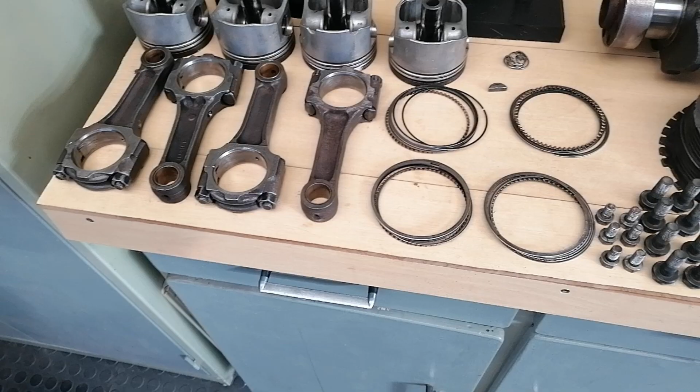In this video we're dynamically balancing the rotating assembly of a 1600, I think it's a VVL Toyota 20 valve engine. Let me just show you the engine quickly. So these are the components laid out here: the 4 conrods, pistons, gudgeon pins, piston rings, flywheel bolts, pressure plate bolts, pulleys, crank, and this is the flywheel and pressure plate.

So I got to make these harmonic, and let's just first see how much they are out. First I'm going to start on the crankshaft.

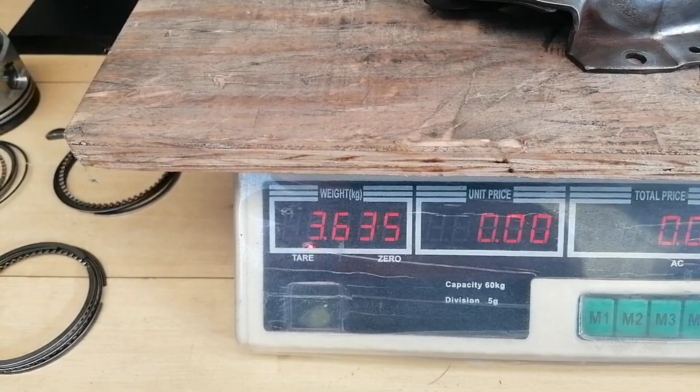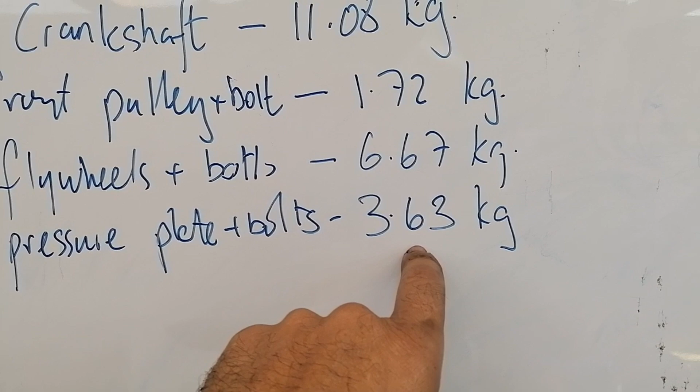Okay, so I took the weights individually of the components, as you can see here, and that is all the weights that I'll be needing to put in the computer so the algorithms can work out what the weights are, where, and where the unbalance is once I calibrate it and all that kinds of stuff.

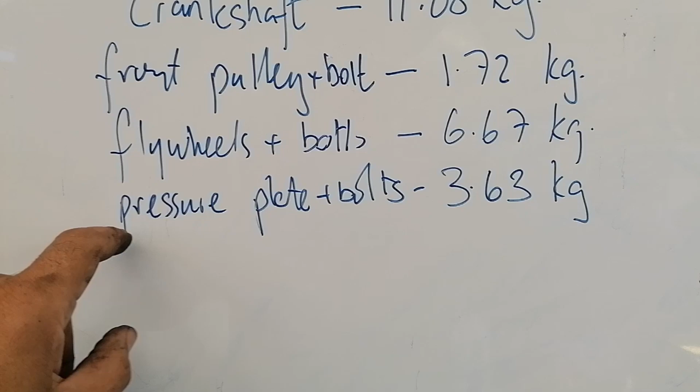But these will all be used individually. First I'll be using the crankshaft as an individual item. Then I'll be putting the front pulley and the flywheel on as two items, and then I'll put the pressure plate on with its bolts and stuff. So first let's set the crankshaft up in the machine and see how out of balance that is, and get that right.

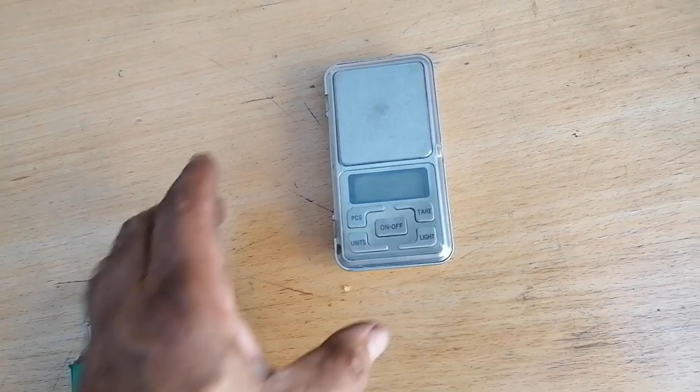Alright, so she's on the machine, she's almost ready to go. Got oil on the journals, belts on, blacks there, my reflector tapes there. Machine is on. Right, so it's time for me to do some measurements on here now.

Stick it in there and balance this boy. Okay, so also just on a side note...

I'm going to put this thing's operational speed at 5,500 revs, but I'm only going to balance at 700. So in other words, although I'm balancing at 700, the algorithms will work all this weights out at 5,500 revs, like when the engine is actually working at that rev range, 5.5. I'm not going to go to 6,000, 7,000. I mean, that was, you're just going to kill things.

That's temporary. Revs 5.5 is basically where the rev will stay most of the time, at speeds and stuff like that. So I'm going to work at that operational speed, 5,500 revs, but my balancing speed is going to be 700. I don't know if I said 700 early on, but anyway, let's put this stuff in the machine now.

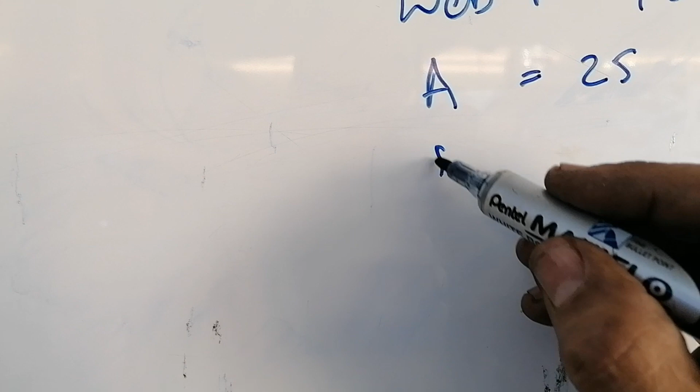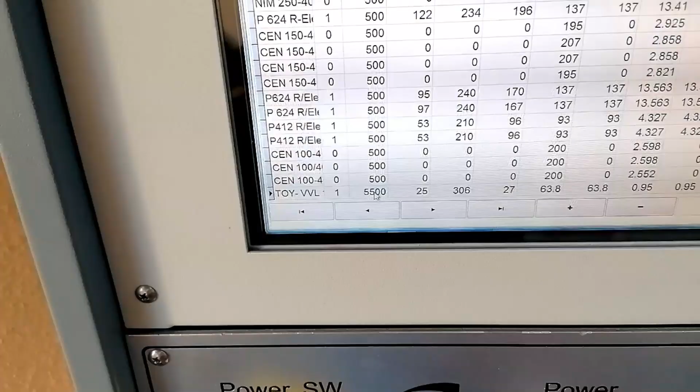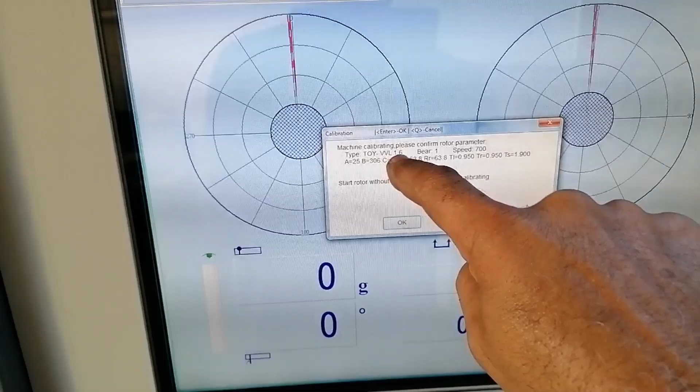Okay, so let's just put this data into the machine. Okay, so I got all the information in. Here's my screen that's up. I'm going to start calibrating now. You can see here I got Toyota VVL 1.6 and I'll start calibrating now.

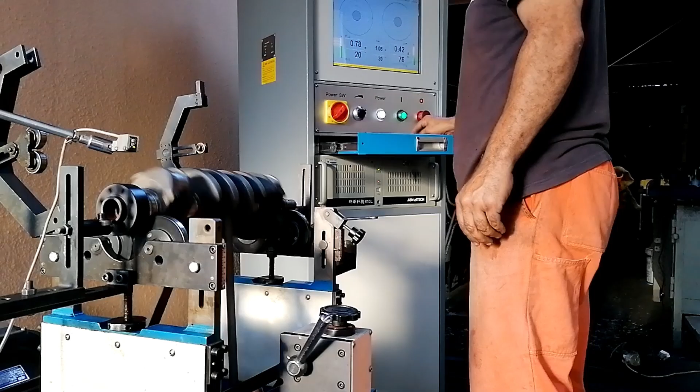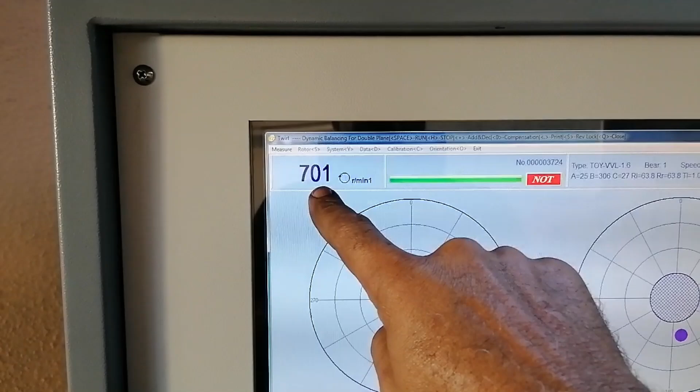Alright guys, so that's running. She's at 700. Like I said, I'm going to do this at operating speed. She's 15 grams at 118 degrees, 7 grams at 167. So let's print this quickly.

Okay, so there we have it. 15 grams, 7 grams. Alright, let's zero this out.

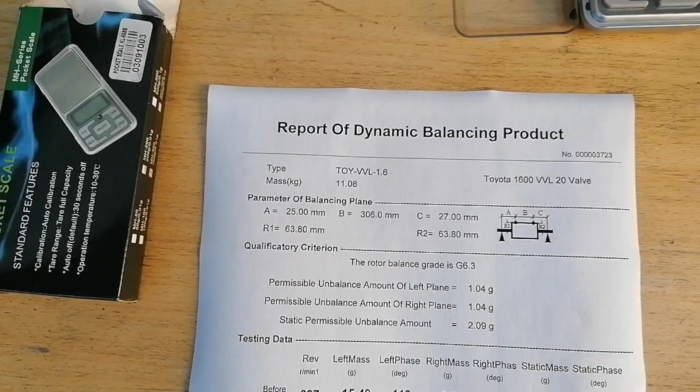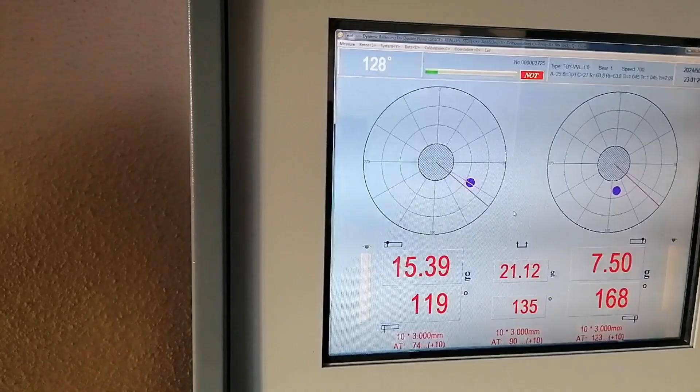Alright, so I'm going to turn it now to 169 at 168 on that one there. Let's just turn, and then that will determine where I must take off weight. Okay, so there, that's 168. Okay, so that's now 168 there. So I must grind somewhere here, and then the next one is 119, so I'll turn it back. There you can see that's 119 there, that's on that mark there, and that is on this one over here.

Okay, let's play around with this crank and see how far I get. Right, so I've been working the crankshaft a little bit, and you can see I'm down to 10 and 2 now, so we are getting closer. I'll keep on going at it.

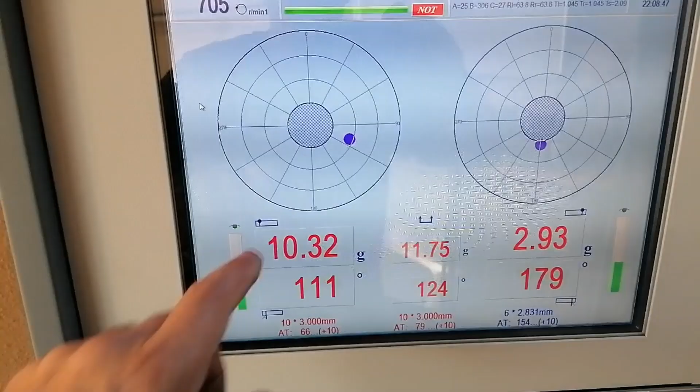Okay, we're running again after grinding. Let's see, going up to 700. And we're down to 3 and 1.3, so we're creeping in slowly but surely.

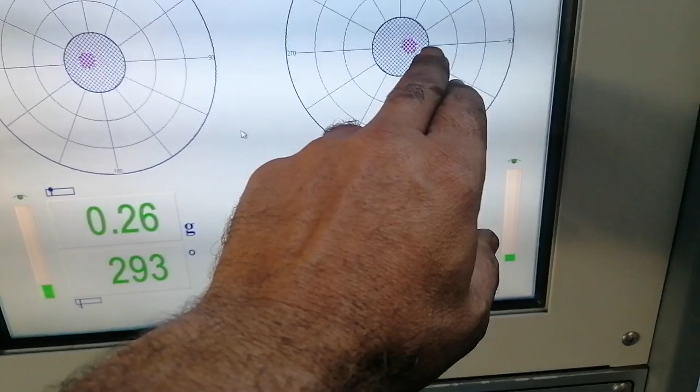Okay guys, so this is the crankshaft done. As you can see, we are 0.26 and 0.32, slightly off the center, but I mean that's neither here nor there. The main fact is that we're under half a gram out, so the crankshaft is perfect. So let's just print this quickly.

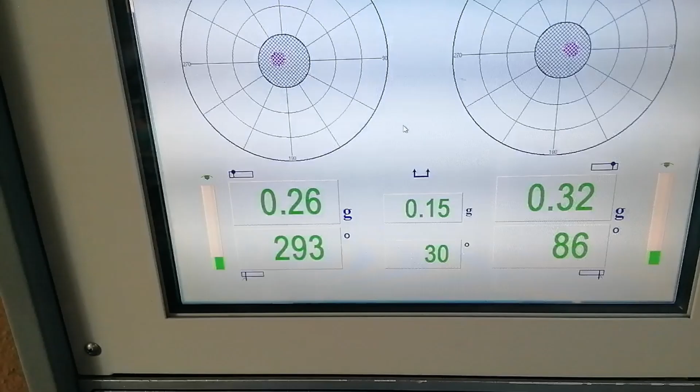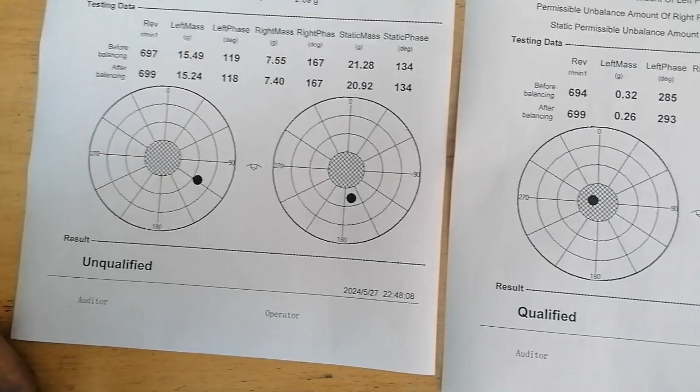Let's just compare quickly. In its unqualified state, you can see it was 15 grams out at 118 and 7 grams out at 167. Like I said earlier, it doesn't sound like much, but that's a lot at high revs. With the inertia, centrifugal forces and all that, that's quite a lot for a crankshaft. Then I brought it down to 0.26 and 0.32, so that's as near as damn it.

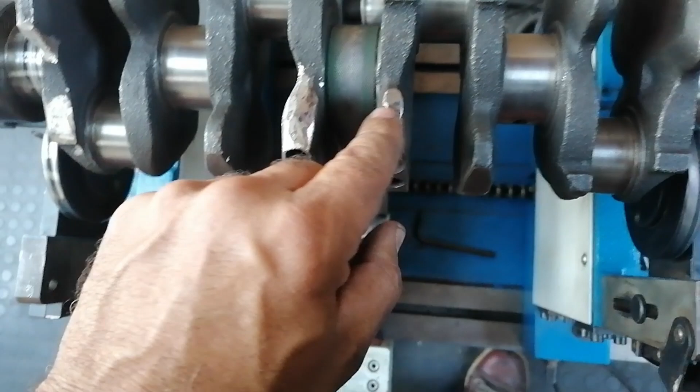As far as the crankshaft goes, I had to grind quite a bit here, because this lobe was actually as high as this one, but I had to take quite a bit off. Then I touched a bit in these corners here, all on this plane, to get that 15 grams out. I mean, 15 grams is a lot. There wasn't place for me to drill a hole here because it was quite on the edge, so I had to drill there instead, which is why I just took that off. On this plane, I drilled a small hole and had to work these corners. So anyway, this is the crankshaft all done now.

So as far as the crankshaft goes, that's now done, that's zero in my eyes, all balanced out. Next is the flywheel with the pressure plate and the front pulley. Let me just stick that on, and I must also adjust the machine to accommodate for the diameter of the flywheel, so I have to do some adjustments there. But anyway, I'll carry on.

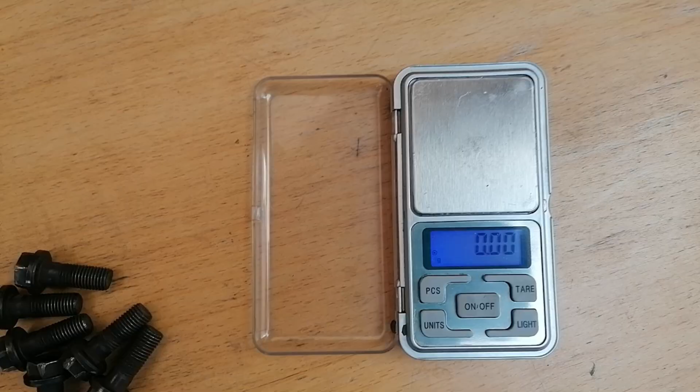Okay, so let's just weigh the flywheel bolts. 26.84. And 26.80, so they all weigh 26.8. The second decimal I'm not going to bother with, that could just be dirt or something on here, but that's seriously nothing. So let's carry on.

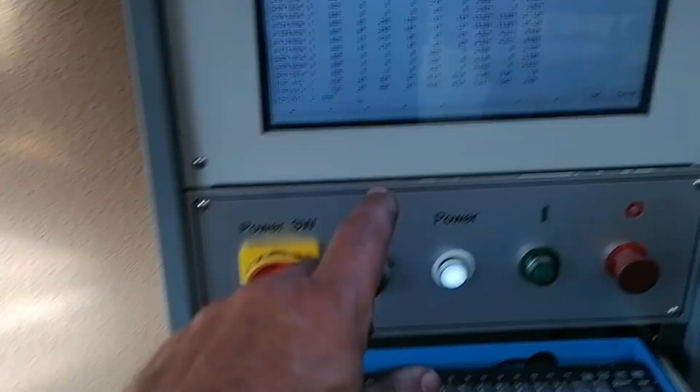Right, so there she is on the machine. You can see I had to shift this back to accommodate for the flywheel diameter. I got a rod inside the crank as a stop, and on this side I got that in, so that's the pulley and the flywheel all ready to be balanced. I'm going to use bearing mode 2 here, because I'm balancing - remember that in the middle, that's the crankshaft, which is zero. I'm measuring the flywheel this side, I'm measuring the pulley this side, so I'm using bearing mode 2. I'm going to just measure A, B and C and stick it in the computer.

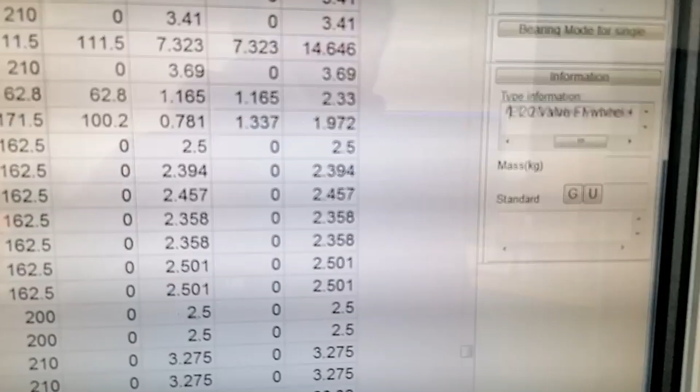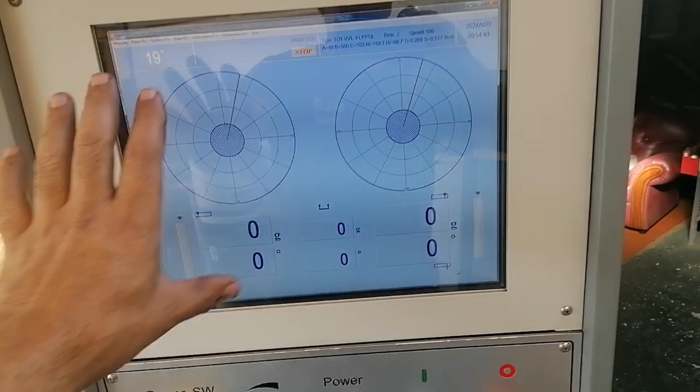Alright, most of the data is caught up now. I must just do the calibration and the arithmetic. It's worth knowing that I set again the operational speed of this engine at 5,500, so the computer will work everything out, all the balances and tolerances at 5,500 RPM. But I put the balancing speed down to 500 and not 700, simply because I've got these extra weights on, so the balancing speed is really not that important, it's the operational speed. Anyway, I'm going to capture the rest and then I'll get going.

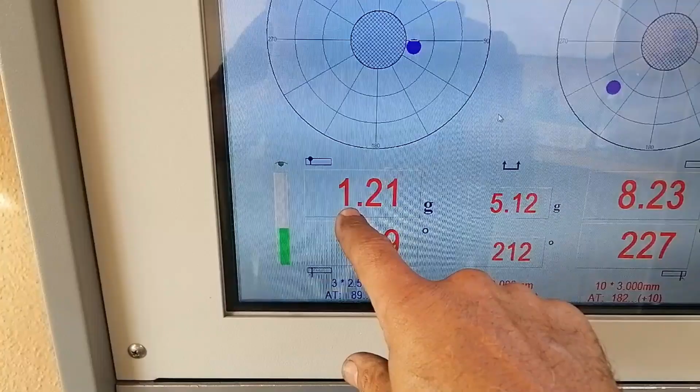Okay, so I've done all the calibration and she's at 504. I can turn that slightly down, and you can see she's 1.21 grams out on this side at 99 degrees, and 8.23 at 227 on this side. So this side is quite a bit out - I think it's because this thing was welded on afterwards. This trigger wheel was welded on afterwards. Anyway, let's print this.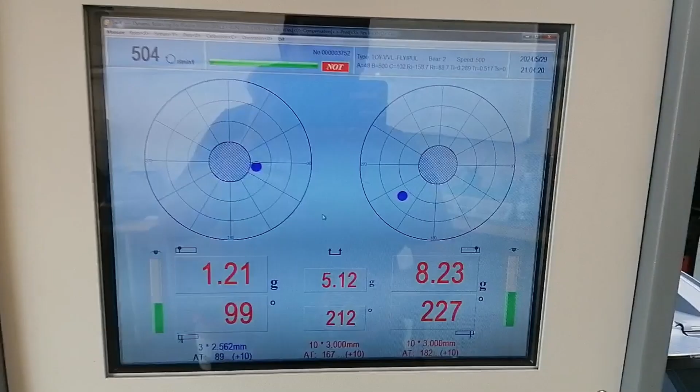Okay, so there we go - VVL flywheel pulley, 1.21 on the flywheel side. That's not too bad actually. And 8.23 on the pulley side. Like I said, the trigger wheel was welded on afterwards, and I think that is what threw this pulley out.

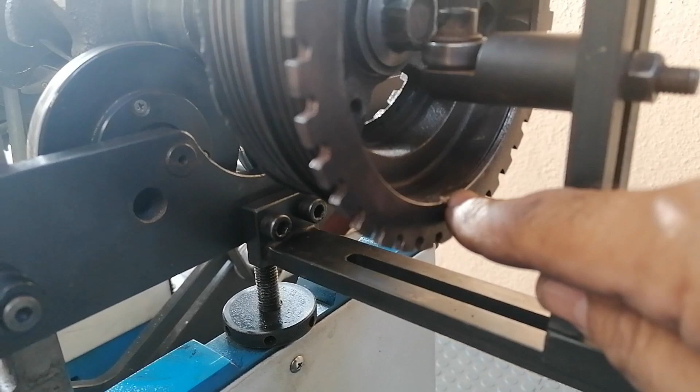But let me just show you quickly. Okay, so here you can see there's a lot of notches in this pulley, there's a whole chunk missing here. This pulley took some damage over the years, and this trigger wheel was welded on there and there, and like on this side - so the welds are not symmetrical to the center either, which is also throwing it out. But anyway, I'm here to correct it. Right, so let's start.

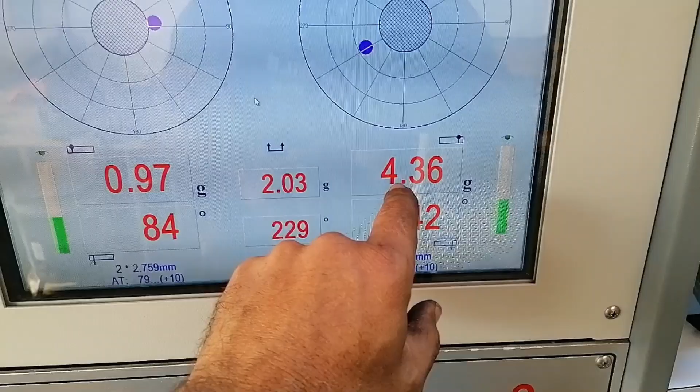Alright, so I worked this a little bit. I drilled a hole there and grinded slightly here, and you can see we're down to 0.97 where we started at 1.5 or 1.2, I'm not too sure, and this one we started at 8 and we're on 4, so we're halfway down here, and we're heading in the right direction.

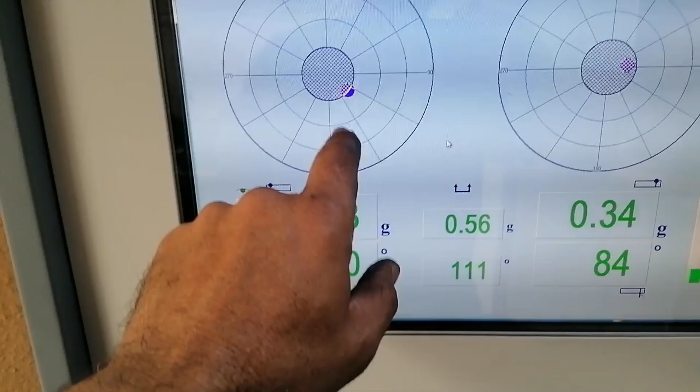Alright guys, so this is the flywheel and the pulley, and I got it down to 0.28 and 0.34. Not exactly in the center, but acceptable. This 0.28, which is slightly out, is flywheel side, but remember I must still put the pressure plate on, so I'm not too concerned about that. And 0.34 is not exactly in the center, but when I put the pressure plate on, it will affect the pulley on this side. But as far as dynamic balancing goes, this component is sorted.

Okay, so let's print this quickly.

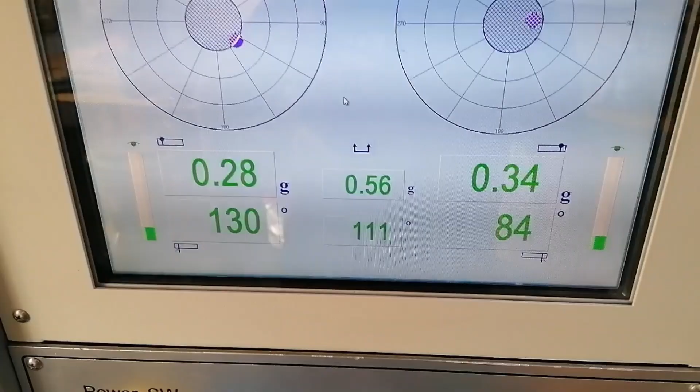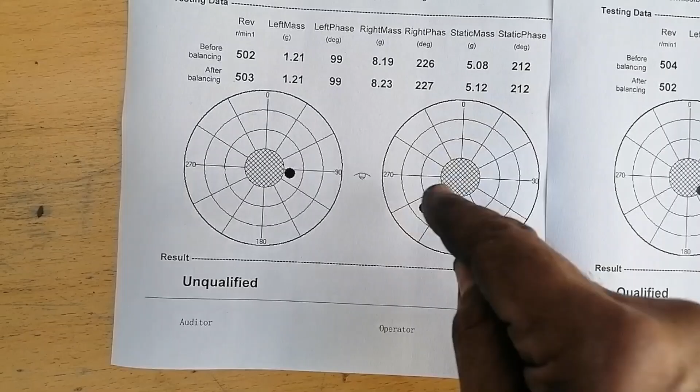Right, so here's the comparison. When we started it was 1.21 at 99, and it came to 0.28 at 130, which is acceptable, qualified. This one came to 0.34, and this, when we started, was 8 grams. This was actually quite a lot out. Like I said, I think it was the welds on the trigger wheel that was added afterwards. So anyway, this is good to go.

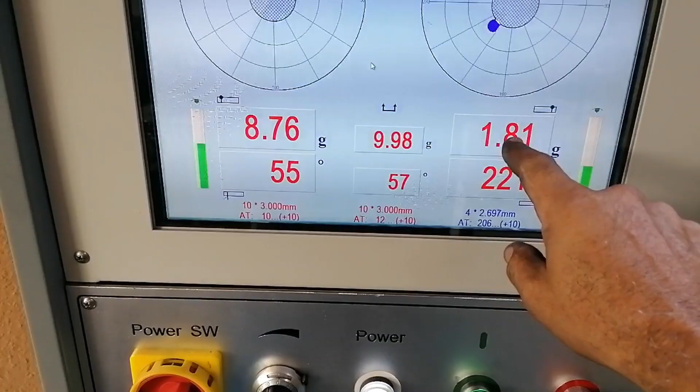Now I'm going to put on the flywheel. Right, I got the pressure plate on, and she is 8 grams out, and you can see how it affected this, because early on this was 0.34, I think it was. You can see that's gone up. So as I take off weight there, that should kind of become less and less up.

Let's just print this quickly.

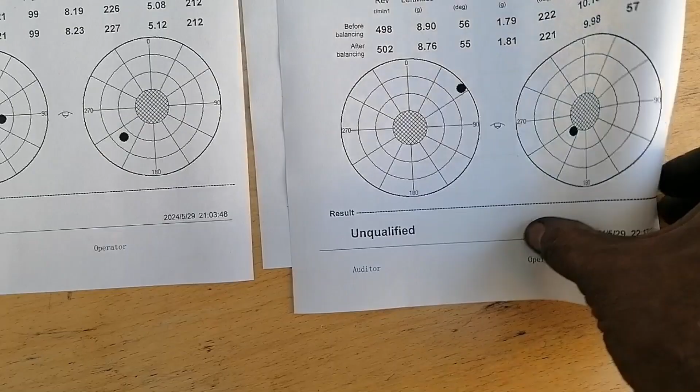Okay, this is the pressure plate. It's 8.76, 1.81 on the pulley side. So that's how they affect each other. And you can see before I put the pressure plate on, it was 0.34. So it was not too bad actually.

Let's just work on the pressure plate now.

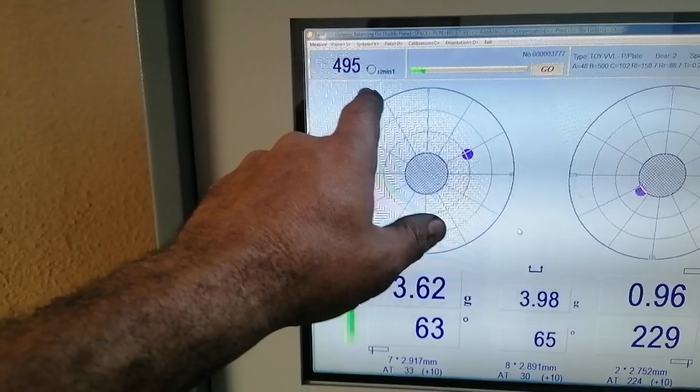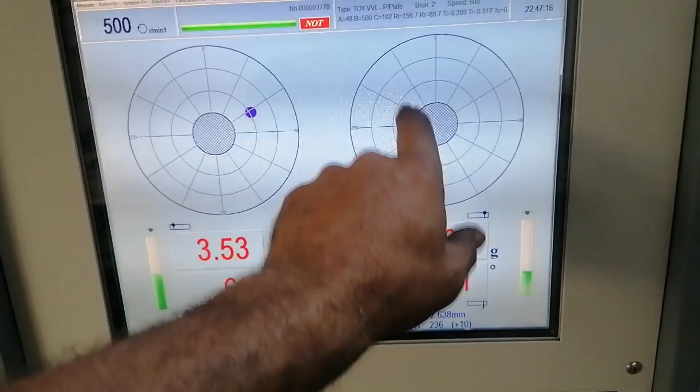Alright, so I'm still busy balancing the pressure plate to the assembly. And you can see I'm down to 3 and 0.87. So you can see as I'm taking off here, it's affecting this side. I've done absolutely no work this end. I didn't touch this side, because this was all in balance. Only thing I added on was the pressure plate, and as I'm bringing that down, it's affecting that, so everything will start moving in gradually. So yeah, let's work on this some more.

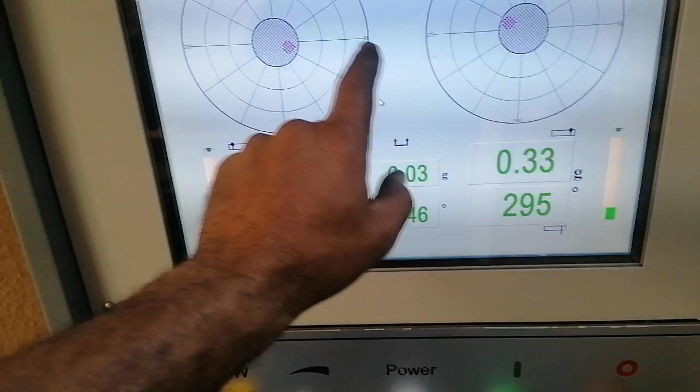Okay guys, so this is now the flywheel, and as you can see there, she's on to operating balancing speed: 0.17, 0.33. So this came down almost to where it was prior to me putting on the pressure plate. I think it was 0.34. So this thing is perfectly sorted.

So let's print this quickly.

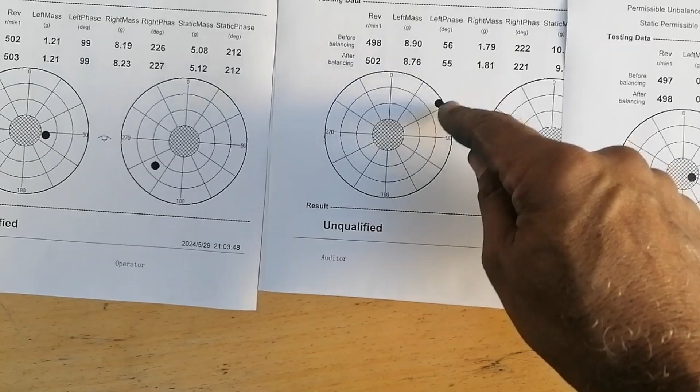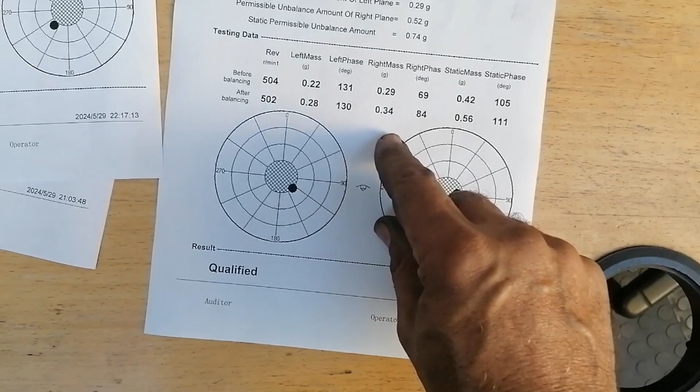Okay, let's make the comparison. So there we go. We started at 8.76 at 55, came down to 0.17 at 109, and 0.33 at 295. You can see here, prior to the pressure plate, where's that one? Just give me a sec. Prior to putting the pressure plate on, they say it was 0.34, and just working the pressure plate and not touching the pulley at all, it came down to where it was, actually, well, I mean, really that difference 0.101, 0.01 is actually nothing. So anyway, this bottom end is sorted out.

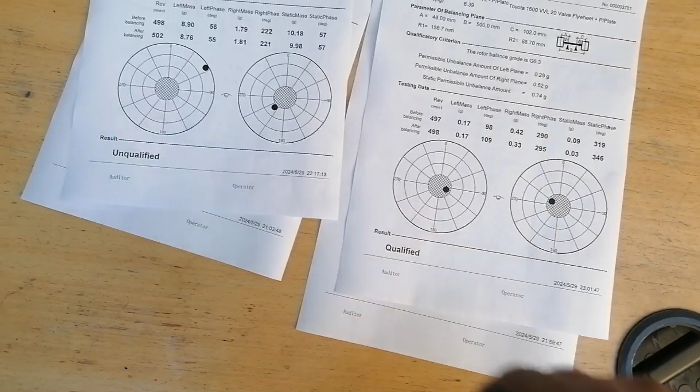Next is the pistons and conrods.

Okay, so let's just get down to what I had to do to balance this thing. On the inside, I decided to drill a hole there, on the inside of the pulley, and on the outside of the pulley I drilled a hole over there. You can see that's a fresh hole, and I think there's two more over there. There's that two over there, and then this thing was sorted out, and that two there, sorry, and then this was the pulley sorted out.

And on the flywheel I drilled two holes there, and I think there's another, and over here, these holes here. And on the pressure plate I drilled a hole there, and this lot of holes here. That's general practice, and she's sorted out.

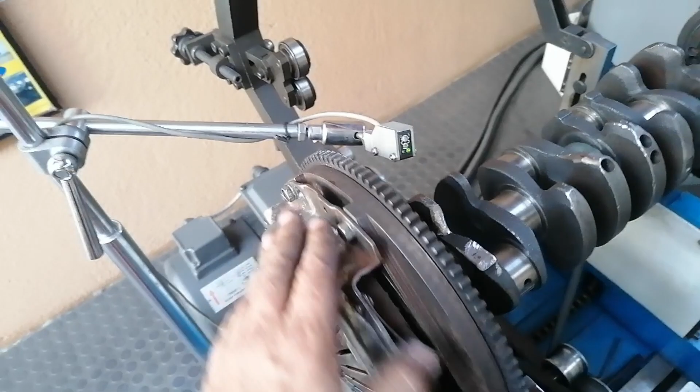So, okay, now the reciprocating parts. Alright, so this lot is next. I'm going to just stick that set of circlips in the pistons. I'm going to mark the pistons, start weighing, and see where we're at.

Okay, circlips are in and they're marked, so let's weigh them down. Okay, so I changed my mind. I took the numbers off so that it doesn't reflect to a specific cylinder. So I'm just going to put like a letter, like MNOP or something to that effect. And then same with the conrods, just for when I start matching them up. Anyway, so I'm just going to change that there.

Alright, so I've done them WXYZ, and I'm just going to put it down on the board here, X, Y, Z, and this is now where I'm going to put the weights down. So let's measure the first one.

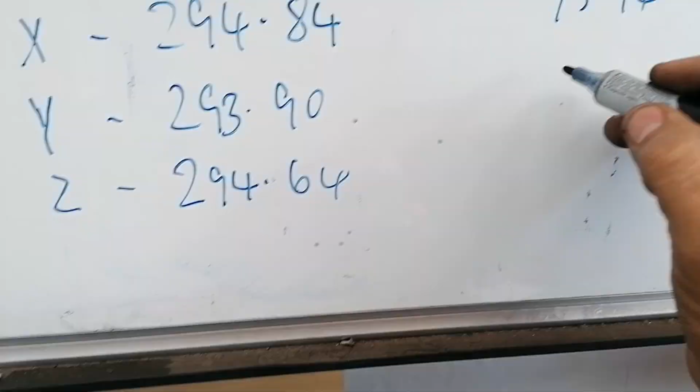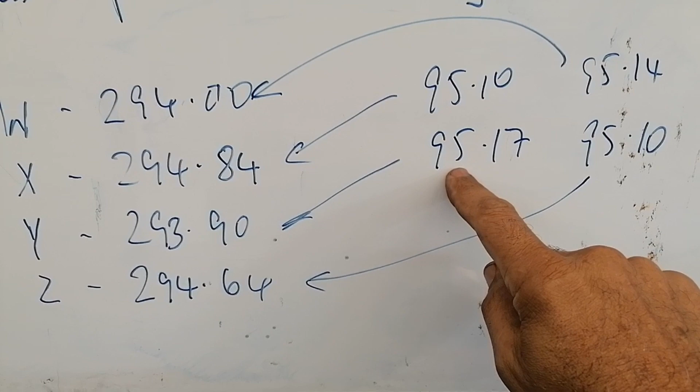Right, so these are the weights of the pistons. These are the gudgeon pins laid out in the order that they were laying here. I wrote it out like that. Then I put the heaviest gudgeon pin with the lightest piston, and the second heaviest gudgeon pin with the second lightest piston. The other two are the same, so I just stuck them wherever they are.

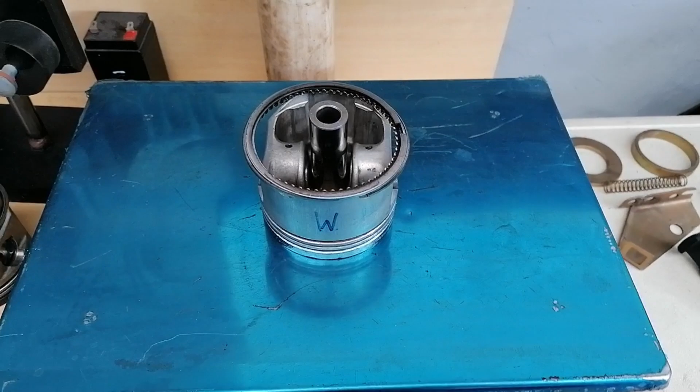So now I want to measure them as a group. I put the rings with the pistons. Now I want to use the bigger scale because this weight exceeds this scale's capacity. Let's put the scale on. You can see she's on 0. Let's take W and see what W weighs. 0.415 is W, let's just write that down.

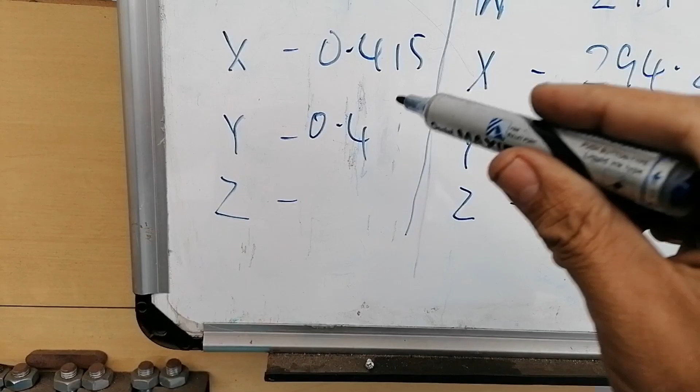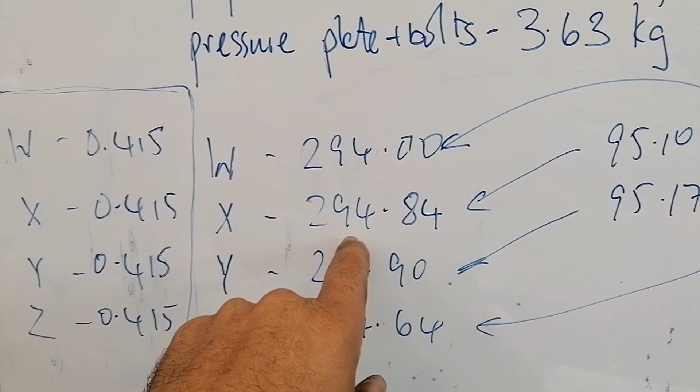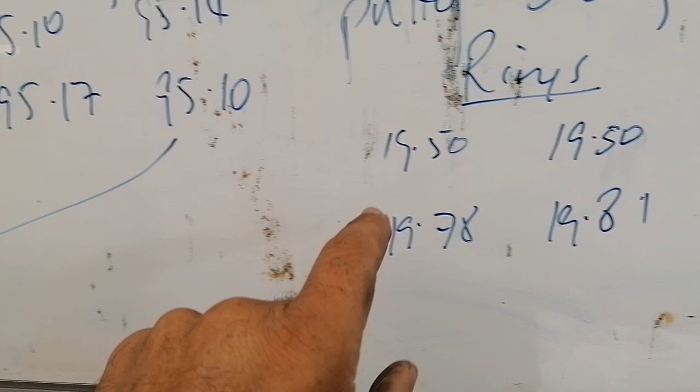Okay guys, so as you saw, they're actually all down to 0.415, all of them. This was the original weight here - they were quite close, this one was just shy short of 294. Anyway, I mingled up the various weights to the different ones. These were the weights of the piston rings, also interchanged, but I'm not too concerned about the piston rings, they all weigh the same. As you saw, they're all exact, the pistons, the way it's set up now.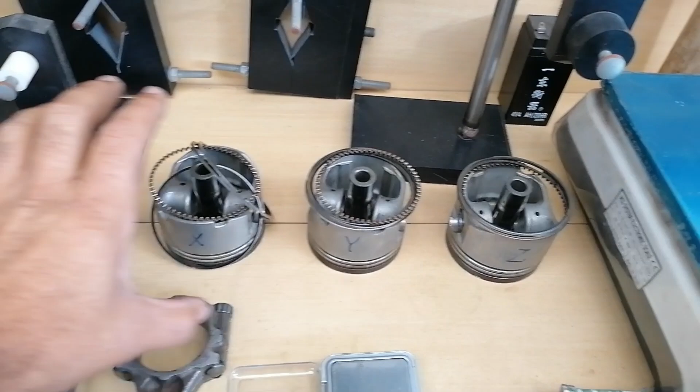So I'm going to mark this so the gudgeon pin doesn't get mixed up with the rest. I'm going to give them a mark, and that is the set now, 0.415. Next I'm going to do the conrods. I'm going to put the big end bearings in there.

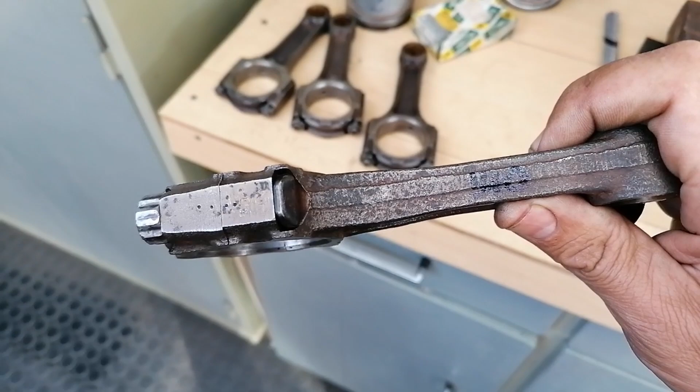Okay, so I weighed all these things. This one was 150. This one was 145. This one was 141. And this one was 140. So this is the lightest one, so I must grind all of them down to 140. Alright, let's start. Alright, so they're all sorted out, they all weigh 140.

This is where I grinded them. This one obviously I didn't touch because it was the lightest one, so it remained the same. So this one was 140, they all weigh 140 - probably like 140.13, you know, those funny little micro digits at the back. I'm not going to be bothered with that as long as the main weight is there. Alright, let's do the next slot here now.

Okay, so I weighed them. This one was 395. This one was 410. This one was 415. And this one was 410.

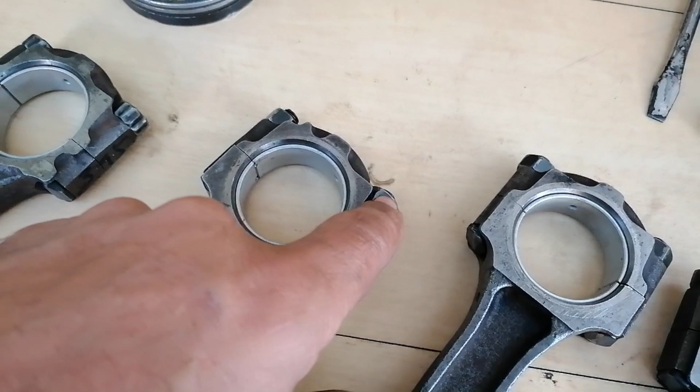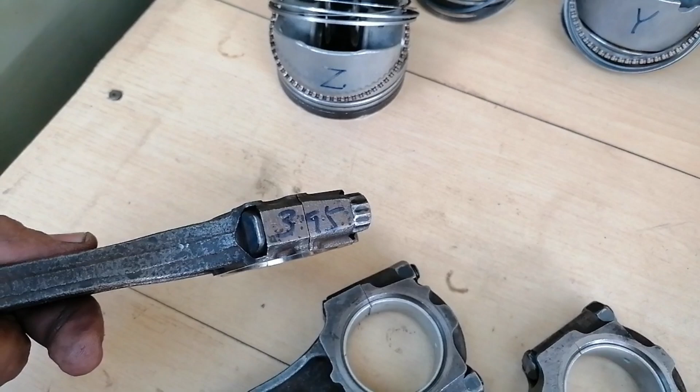What you can see here is a mismatch of nuts. You can see this one's nut here, this one is more of a splined nut, these are all hexes. With a spline, there's obviously more material taken off the nut itself compared to a hex, and I think that's where the difference in weight comes in - why this one is 395 and these are all heavier, 410, 415 and 410. So I'm going to bring these three down to 395. Alright, let's carry on.

Alright, so this is the rods done, guys. This was the one I didn't have to touch, you can see the edges here. And these that I actually grinded to bring the weights down - I took the sharp edges off. I didn't have to take so much off this one because I think this was the 410. This one I took the most off, this was the 415. So that's how that came out.

And this was the other one. So they're all 395 point whatever, insignificant. So this is all done - pistons are done, crankshaft is done. Alright guys, engine's complete, the bottom end's completely balanced out.